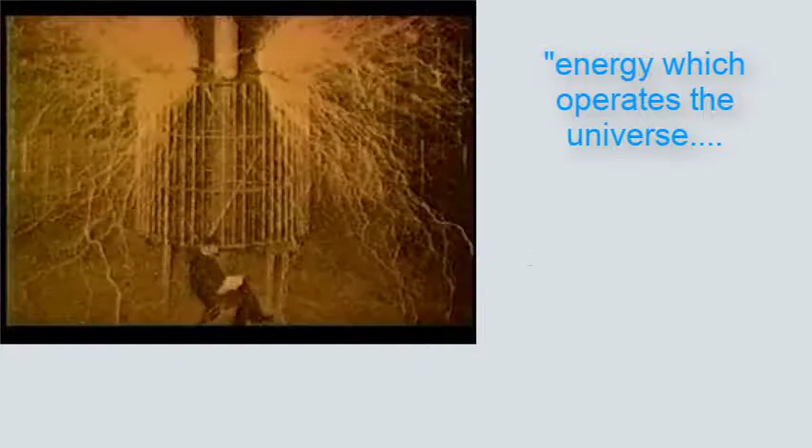With over 200 patents to his name, Tesla was well on his way to transmitting electric power without wires when he ran into trouble with J.P. Morgan and the financial interests of 1901. His ambitious Wardenclyffe project to magnify and transmit power to ships at sea, and eventually to provide free electricity for the whole world, was scuttled by Morgan, leaving Tesla penniless and disillusioned.

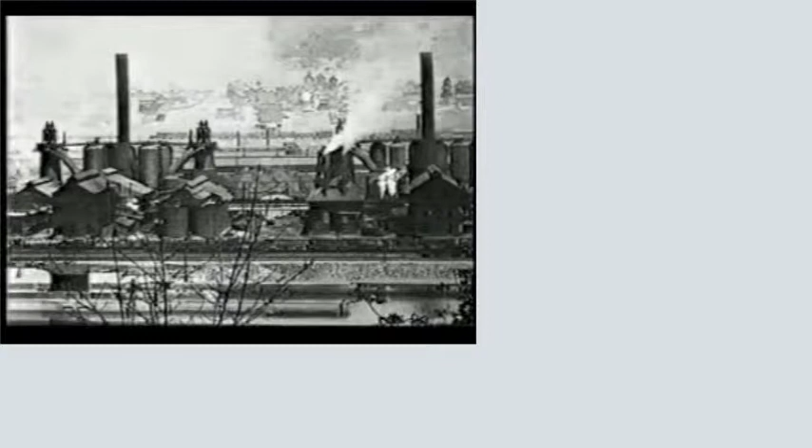The wealthy industrialists of the time knew that their vast plans to wire the world with copper from the mines they owned would be upset if they could no longer control the supply and means of delivery. Tesla's beliefs about developing technology in harmony with nature conflicted with the prevailing American attitude at the time that mankind was put on Earth to subdue and dominate nature.

Little by little, Tesla was denounced as a crackpot and deleted from the historical record. At the time of his death in 1943, Tesla's truckloads of scientific papers were seized by U.S. government agencies. Who knows what ideas and remarkable devices our world could have inherited if only his genius was recognized.

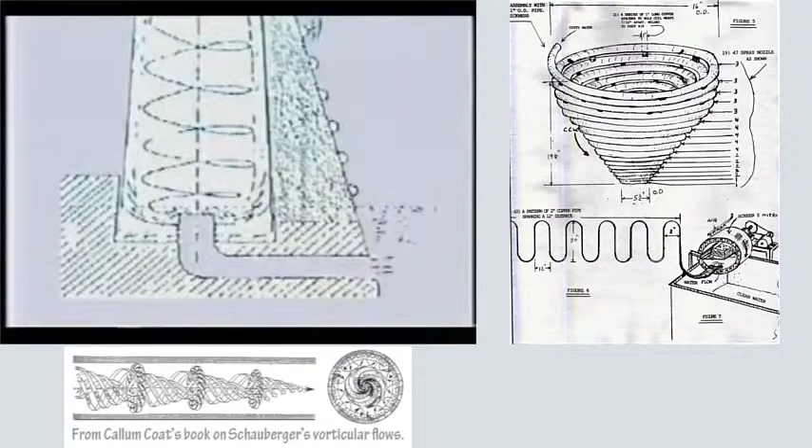Victor Schauberger's vortex experiments during the 1930s resulted in an advanced understanding of how the spiraling motions inherent in all natural systems reverse the effects of entropy. By studying the properties of inwardly spiraling water, he created an implosion generator that concentrated electrical charge.

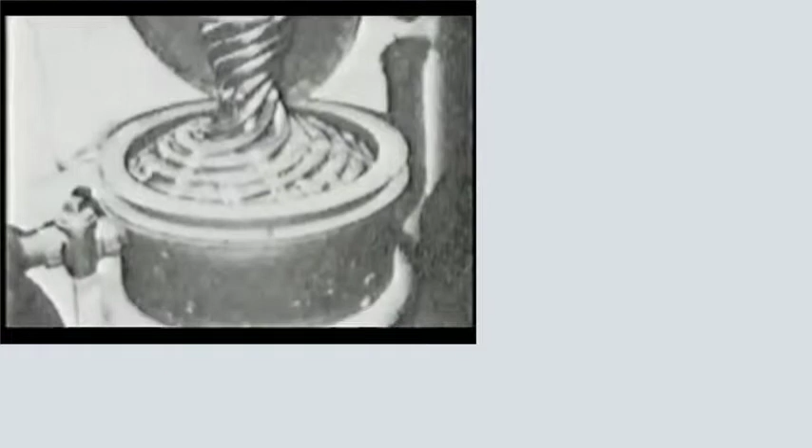Schauberger's ideas became widely known before World War II, when he was coerced to work for the Nazis on exotic discs that resembled flying saucers, as well as his energy generator. In 1958, he traveled to the United States, where he was told he could manufacture his devices, but he was duped into signing over all of his rights, and none of his inventions were ever developed. Returning to Austria, he died a bitter and broken man.

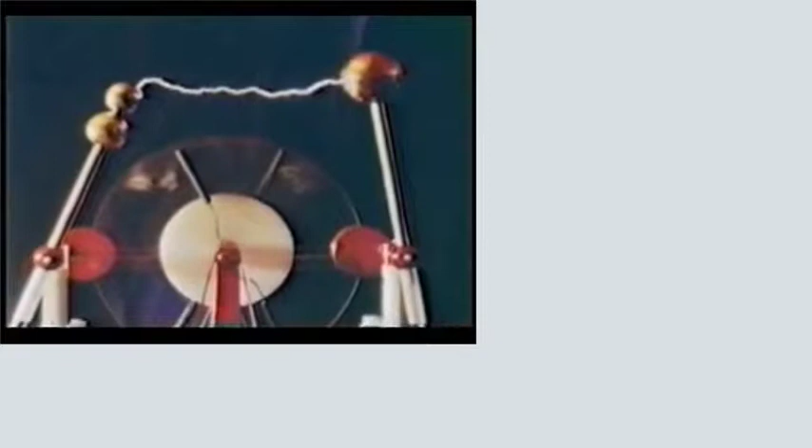Benjamin Franklin is credited as being the inventor of the electrostatic motor back in the 1700s, but its power output was modest. The Wimshurst electrostatic generator is a high-voltage mechanism developed in the 1800s, which can be hand or self-started and will produce dramatic sparking while charging Leyden jars. Today, it's used in teaching about electricity, but its practical applications are considered inconsequential.

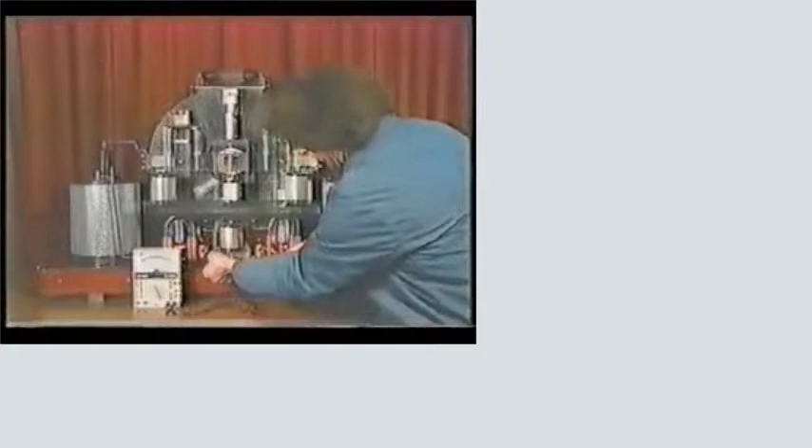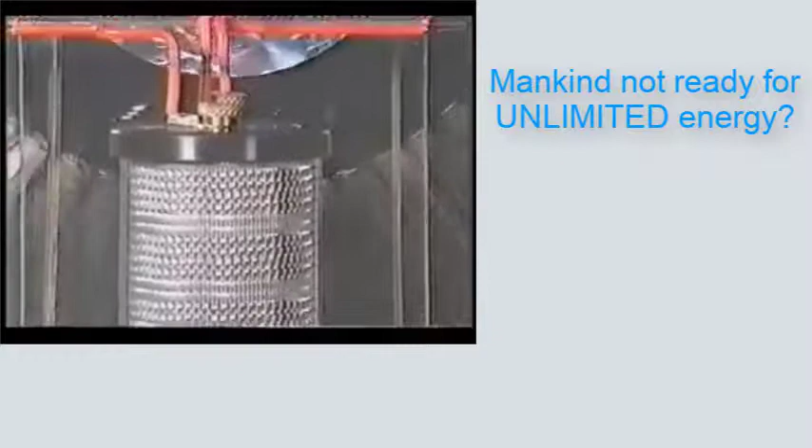A high-tech variation of the Wimshurst device is the Testatica, or Swiss ML converter. Developed by Paul Baumann of the Methernitha community in Switzerland during the 70s, this free energy device is a marvel that has been in operation for more than 20 years, supplying electricity to the small, self-sufficient Christian community. Many technical experts have come away stumped by its excess output. However, because the community feels that the majority of mankind is not ready to be responsible for such unlimited energy, they're keeping the technology under wraps until such time the world is spiritually prepared.

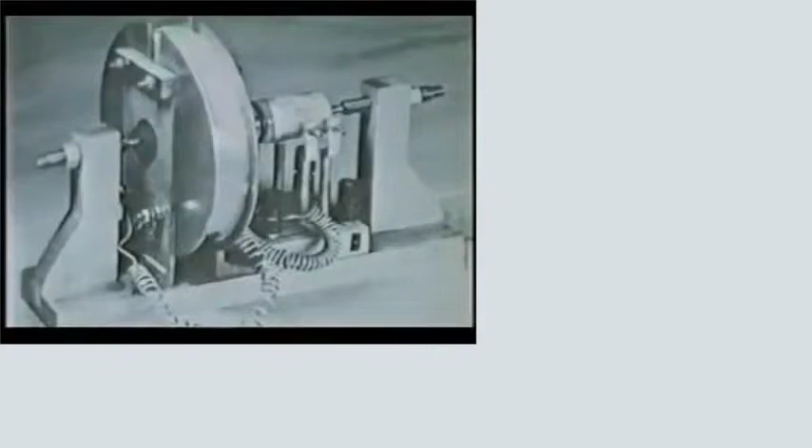Other researchers, like Dr. Oleg Jefimenko, continue to pursue real-world applications for harnessing the electrostatic motor. Like the homopolar generator, the electrostatic motor is based on the dynamics of our Earth environment. As with wind and solar power, they offer real, sustainable alternatives that, with only modest gains in efficiency, could contribute to the replacement of our current dependence on fossil fuels.

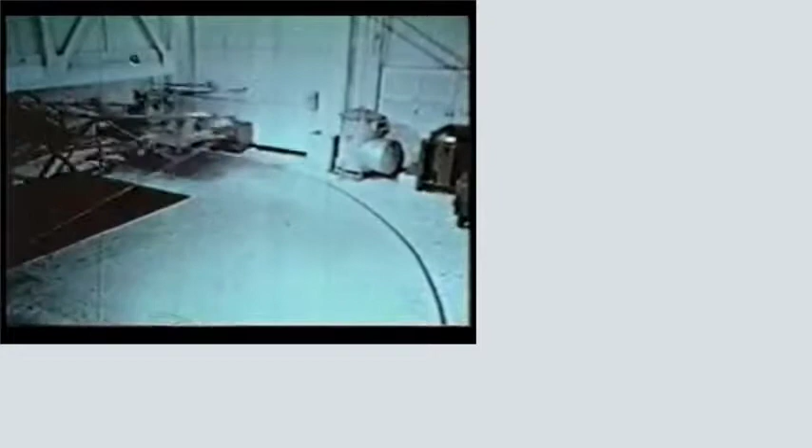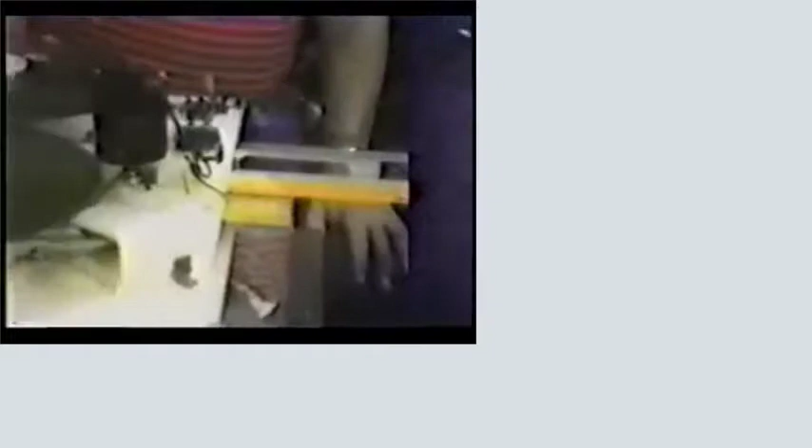The force of inertia is known in mechanics, but until only recently, it had been considered too weak and difficult to harness for propulsion. According to some theorists, like Hal Puthoff, inertia, like gravity, is what occurs when we try to accelerate an object against the zero-point fluctuations in the vacuum. We run into resistance.

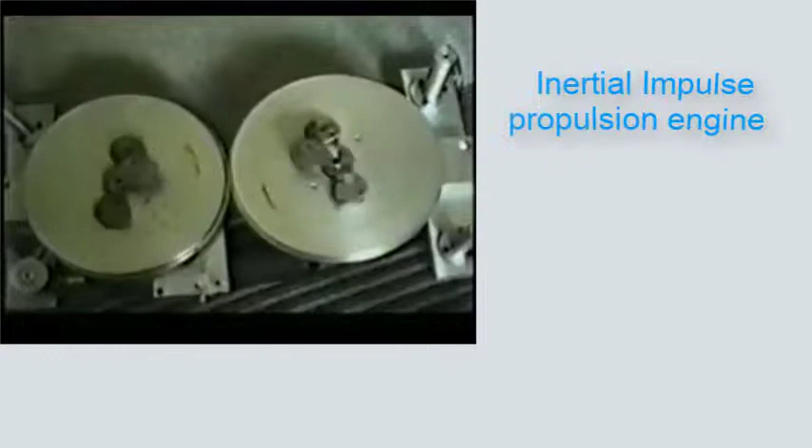Canadian inventor Roy Thornson has developed an inertial impulse propulsion engine which overcomes that resistance using centrifugal force. It pushes against nothing and emits no exhaust, but it's been calculated to be 20 times more efficient than a jet engine.

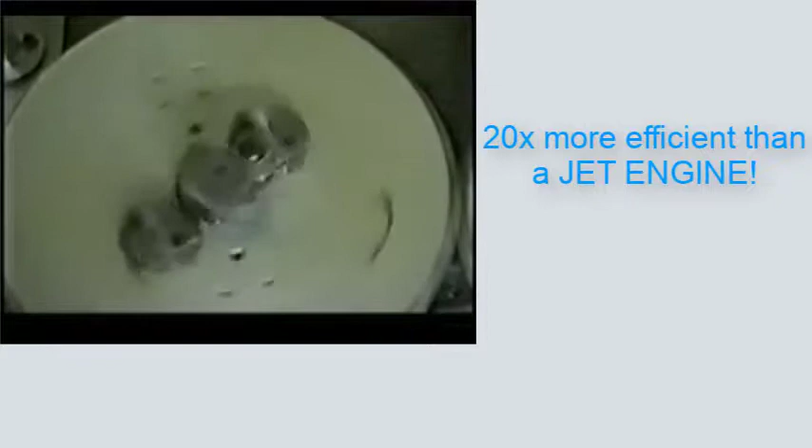Here, the Thornson inertial propulsion drive powers a canoe in a swimming pool. The motor, which is housed in a box, never contacts the water or air.

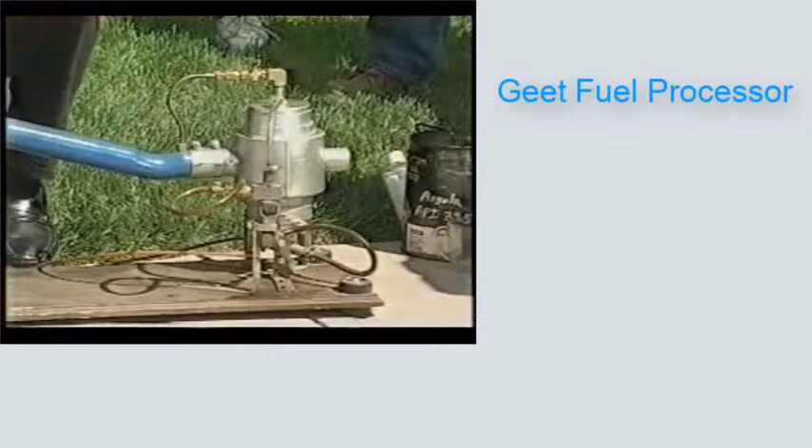Utah inventor Paul Pantone has developed what he calls the GEET fuel processor, a plasma generator similar to a super carburetor that actually appears to run on 80% water and is entirely non-polluting. This device replaces the carburetor and exhaust and combines them as one unit, whereas this end of it acts as a miniature refinery, allowing the engine to run on everything from battery acid and water mixed to crude oil right out of the ground. This is Angola crude, a 39.5 gravity.

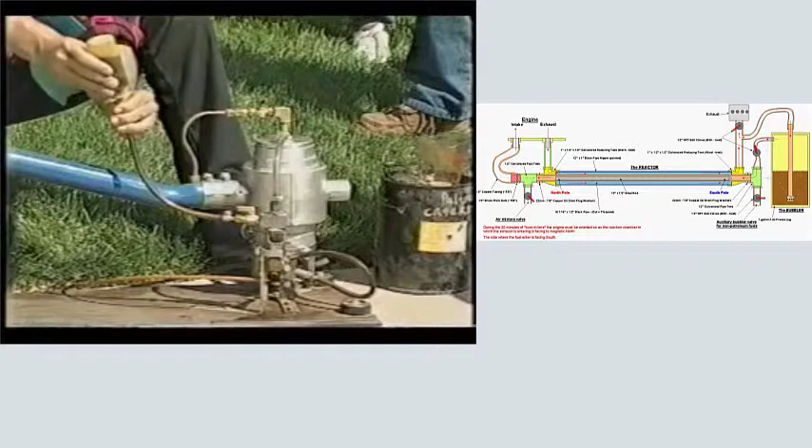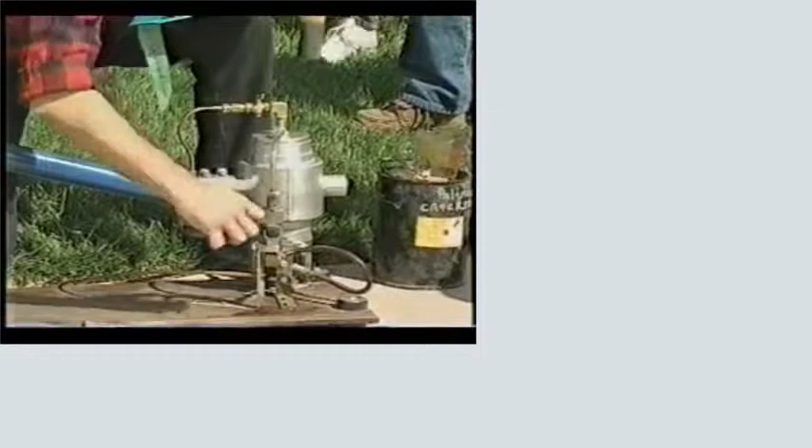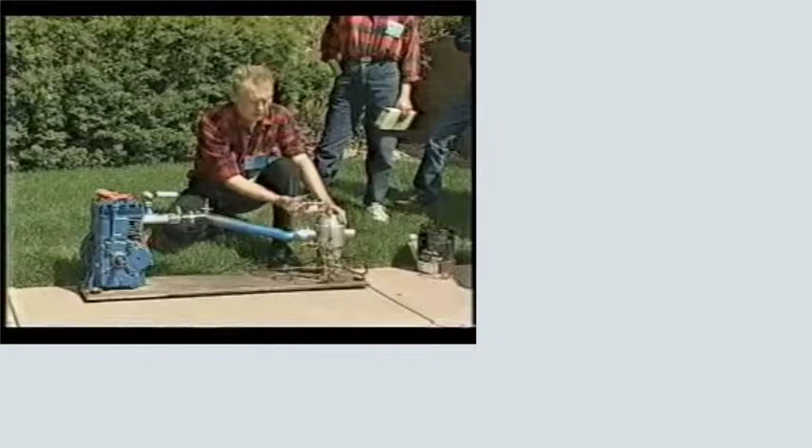The exhaust coming down goes around and comes out here at the far end. The center chamber draws some of the heat from the exhaust, plus this tube takes some of the exhaust gases, takes them up into the chamber, and bubbles them down to the bottom. The bubbles, as they come through the fuel, are brought up to the top of the chamber, picked up through a tube, and fed up the center of the exhaust pipe. While they're being fed up the exhaust pipe, they are in a vacuum, and there's a heat exchange which occurs.

This process has been argued a few times to be either a plasma field or an electro field. We do know that it does have a slight radiation, which is not alpha, beta, or gamma, and we do have x-rays to show that whatever is coming from the unit does get affected differently from stainless steel than the regular steel.

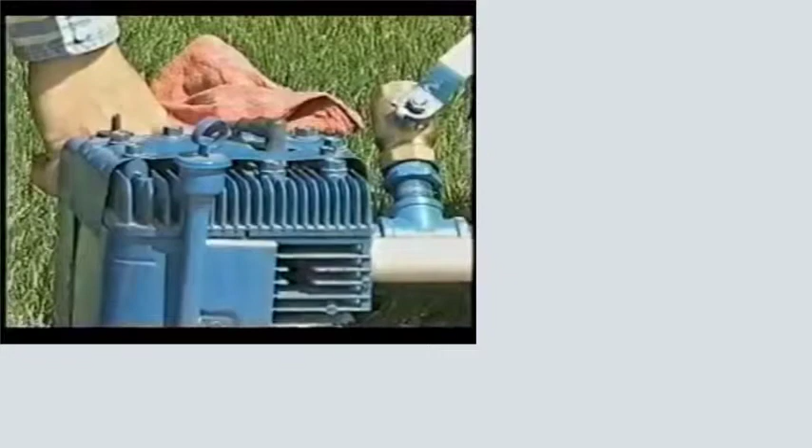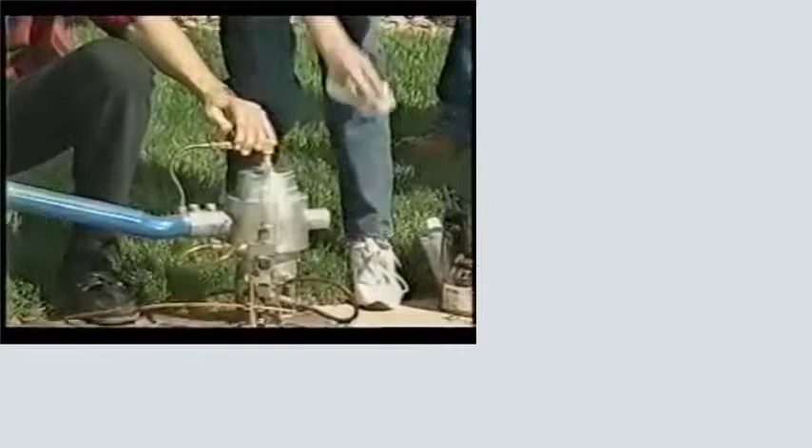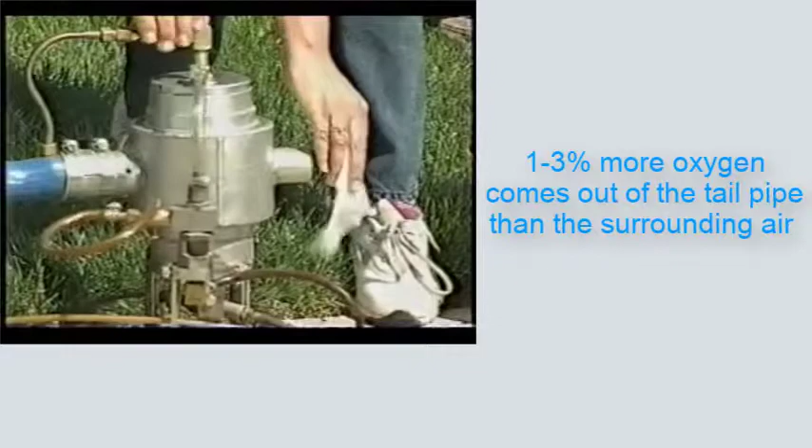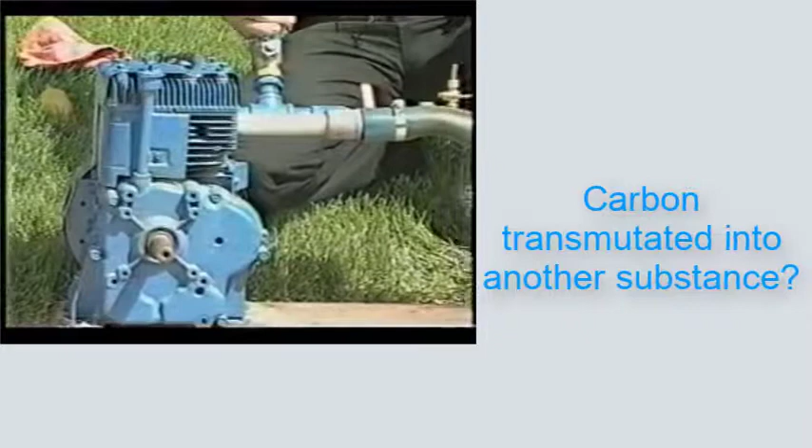When the temperature of the exhaust is the same as the air temperature going in from the air portion, there's normally 1 to 3% more oxygen coming out of the tailpipe than there is in the air we're breathing, and no carbon at all. Carbon vanishes - I wouldn't say vanishes, I would say transmuted into some other substance, a lighter element.

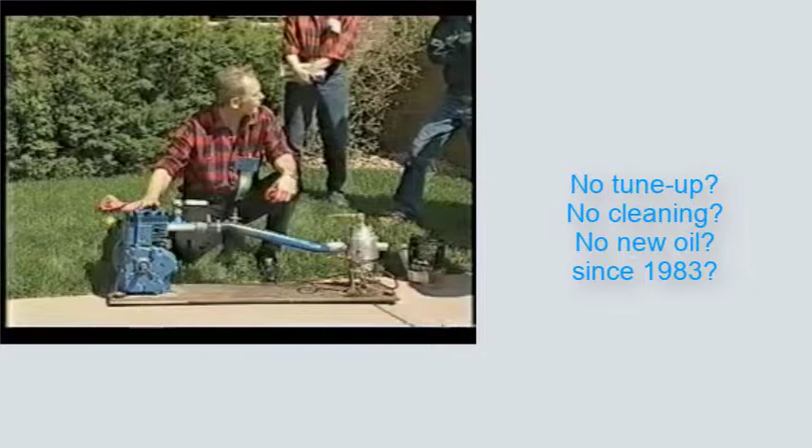After running this engine from 1983 until now, and many times we had it running 8.5 hours a day, we have never had to change the spark plug, change the oil, or clean it. We have taken the head off 3 times to inspect the inside of it, and it's been spotless.

What we have here is the Pantone GEET device fitted to a Ford 2300cc 4-cylinder engine.

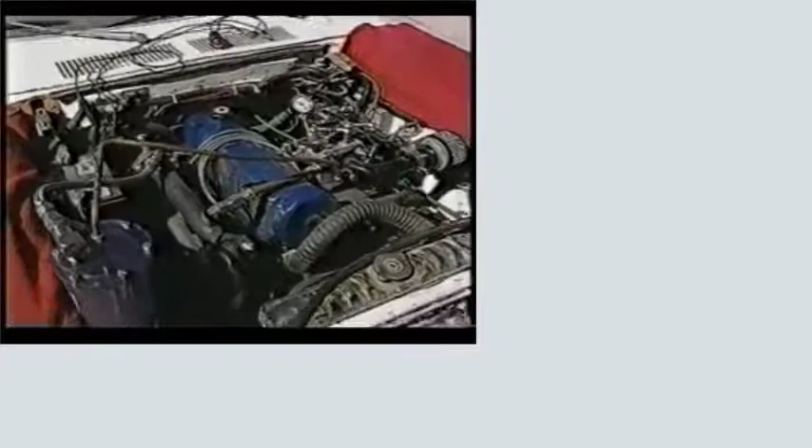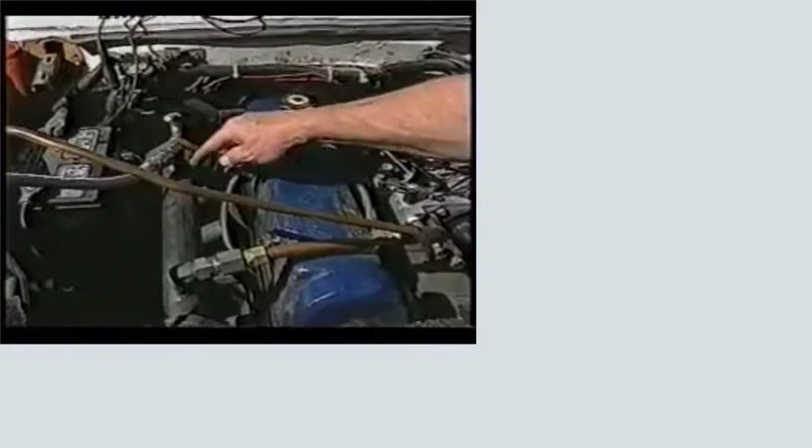As you can see, we have a see-through container here which holds the fuel. As the engine is started, air is drawn in by vacuum through the fuel and bubbles the fuel, the vapors of which are drawn off here. They travel down this hose into our reaction chamber, go up the reaction chamber, and return back out here to be taken into the engine through this tube.

This is our air filter, and this tube is connected to another valve, which are controlled by this linkage, operating the air intake and the fuel intake. This is the valve that controls the return air going through this tube into the bubbler.

During the testing with the 2300cc Pinto, we have achieved efficiency up to and including 300% of normal. If this engine normally got 20 miles to the gallon on the highway, you'd now be looking at 60. Our load tests and whatnot have not been completed, but we feel very confident that there's not going to be a power problem.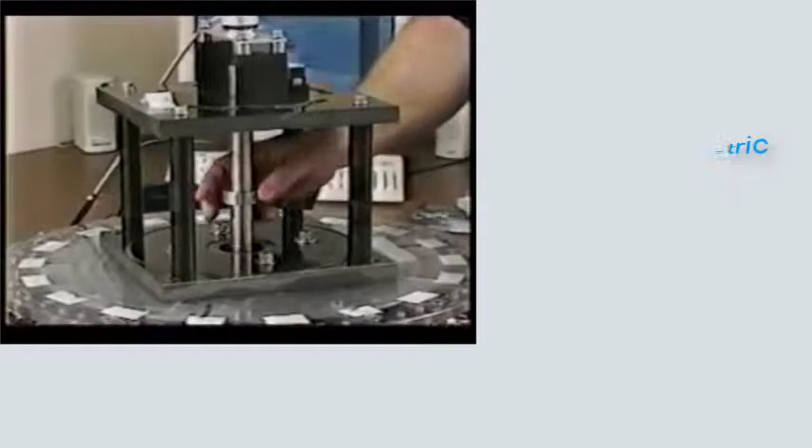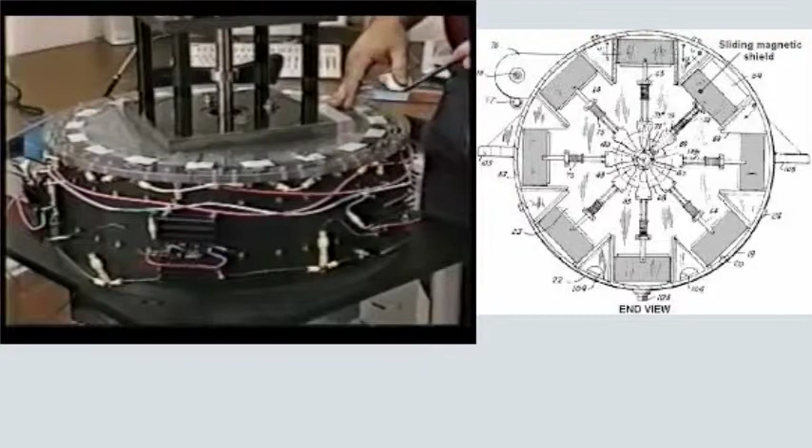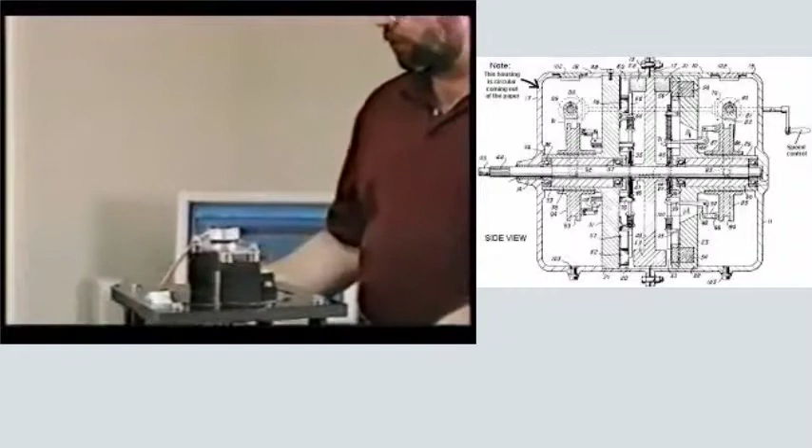There's 18 separate sections, what we call a coil section in here. 18 make up the outer diameter. There's 6 coils here that we're using to drive the motor. At the top here we have an encoder which sends a pulse down to the electronics and basically lets the electronics know where the rotor, the rotating part here, is in relationship to the coils and tells the coils when to turn on and off.

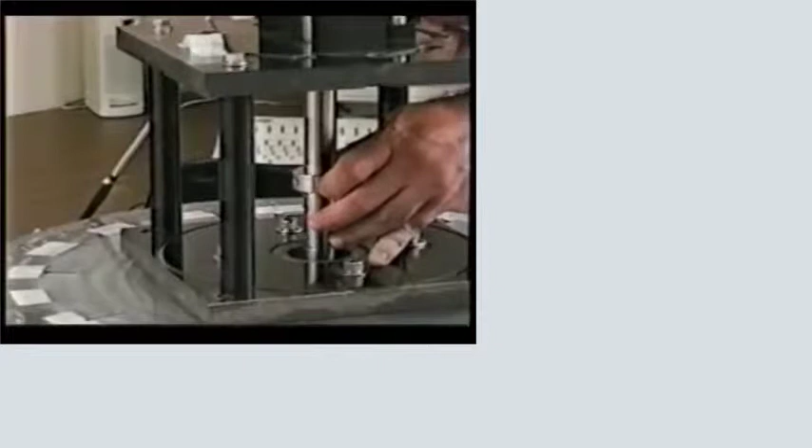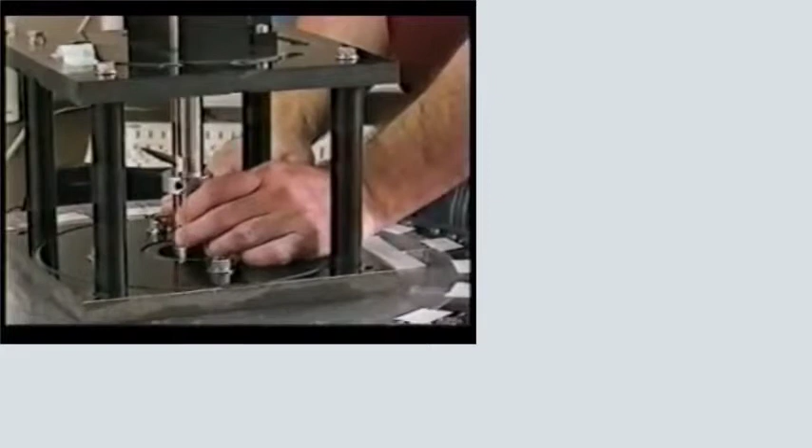That's done by a specific index point that the encoder has that sets the relationship between the two. The electronics down here in the box is basically a set of TTL logic counters. It counts the number of pulses from the encoder, and it turns the power on and off to different coils depending on where the rotor is at the time.

We have also hooked up to this system a connection to the computer over here. What it gives us the opportunity to do is change the duty cycle on the system. We can change it from a pulse rate of 1 pulse per cycle up to 40 pulses per cycle, which would be 100% duty cycle.

That is incorporated in, and what we do is change the pulse rate on the computer. It downloads the data to the electronics. When the index pulse comes around, which comes around once per revolution, it updates the data in the counters, and that's what changes the pulse rate on the system.

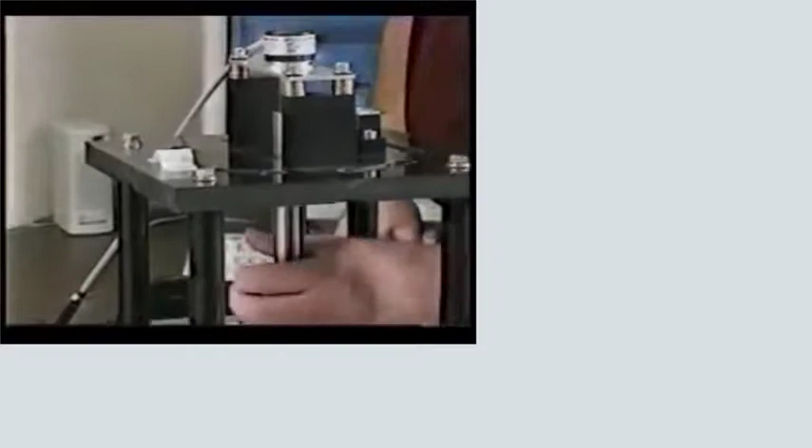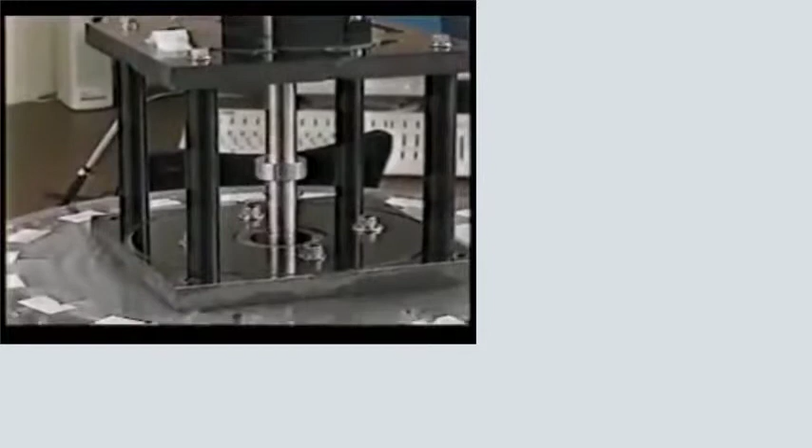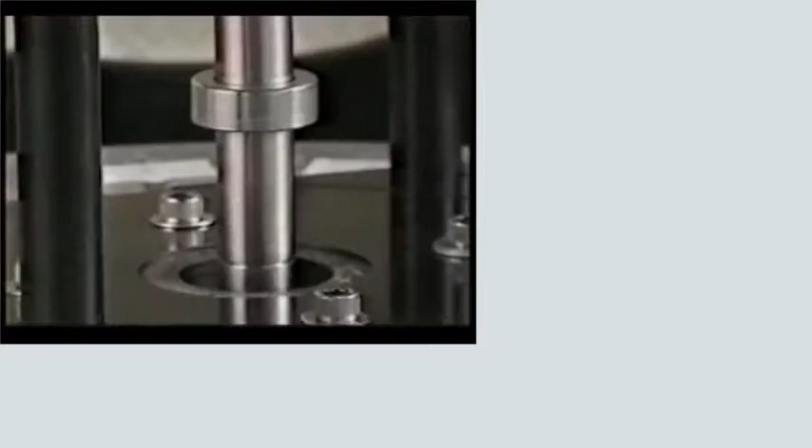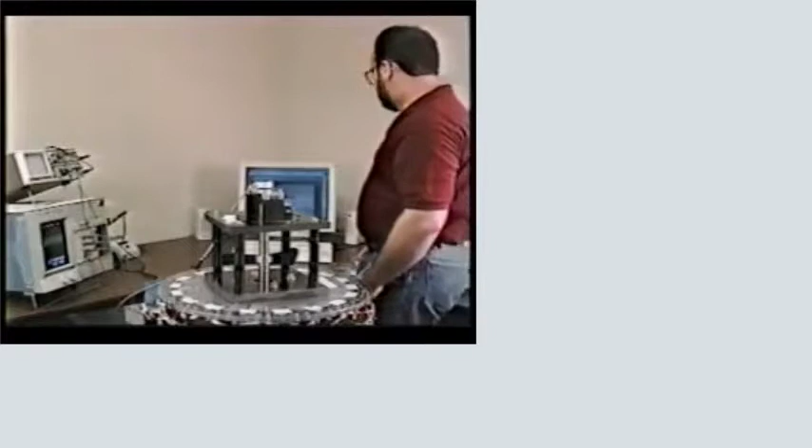The thing about this system is that everything floats on the magnetic field in there. You have very little internal friction. Once the system gets up to speed, it stabilizes at a certain RPM. Right now we're running at about a 30% duty cycle per channel. The speed is still coming up a little bit.

Calculate the speed off the scope here, and we're running about 1,850 RPM. This white and green shows the 2 channels on the motor. The little spikes are the amount of time each channel is on, and the flat part at the bottom is the amount that it's off. So you can see how much is pulsing, how much time it's off, and how much time it's on.

One analogy we like to use: it's like if you pick someone up and carry them across the street, you use a lot of energy. But if you put them in a tire, once you get it started, all you have to do is tap it a little bit, and you use a lot less energy to move the same load. That's what we do—we build it up to a high speed, then just tap it with a little juice as it goes around, using the inertia built into the system to take it the rest of the way.

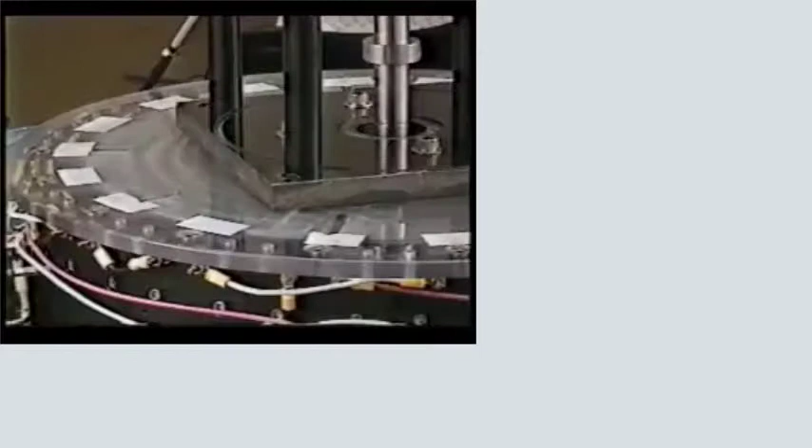So we're using a high-speed pulse on the system. What we're doing is removing energy from the magnet. The magnet has a specific life—they lose approximately 1% a year. So we're not actually trying to create energy from nothing. The system will not run forever; it's not perpetual motion. We use the amount of energy that's in the magnets. Once that energy is used up, the magnets can be taken out and recharged. All we're doing is maximizing the efficiency of the electromagnetic flux density that's there for the production of electrical output.

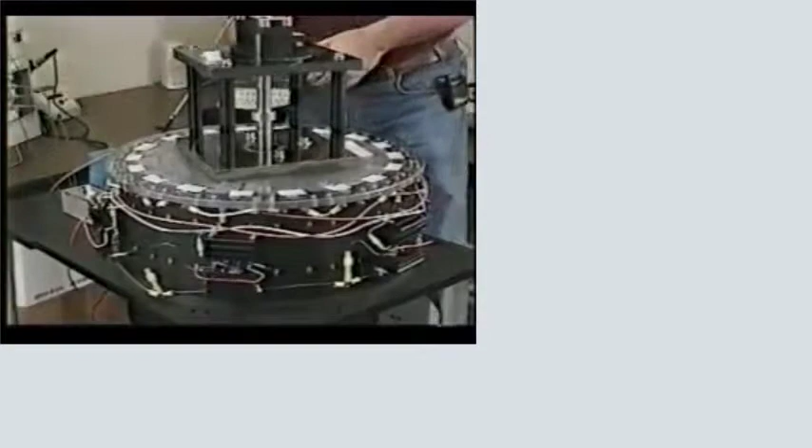Troy Reed has been busy in his shop constructing rotating magnetic motors that he believes will soon revolutionize how we get around. And it does work.

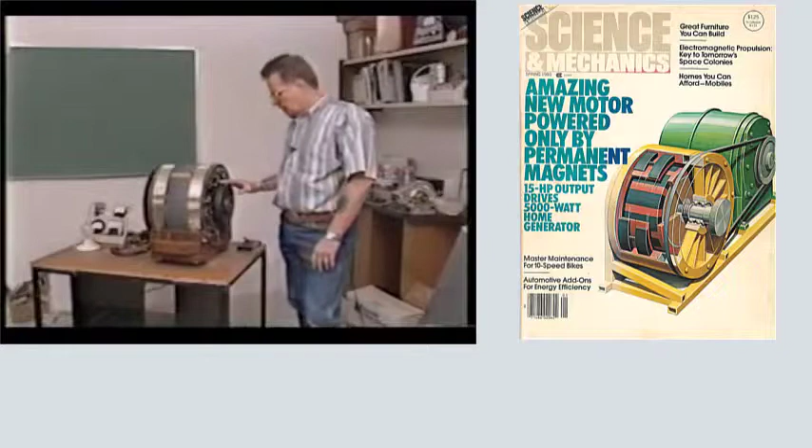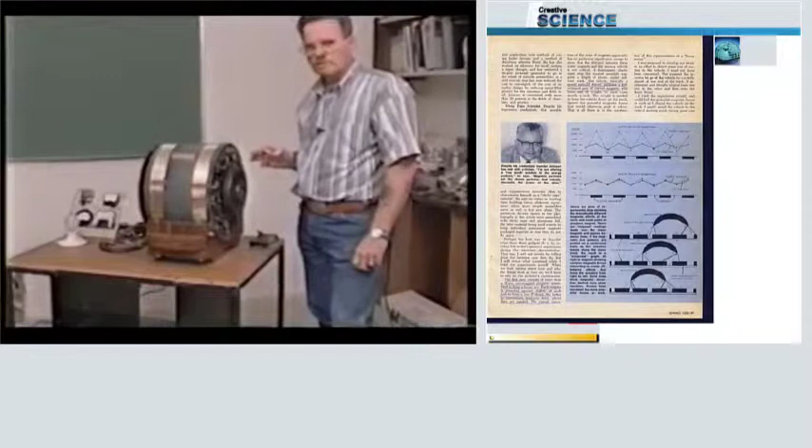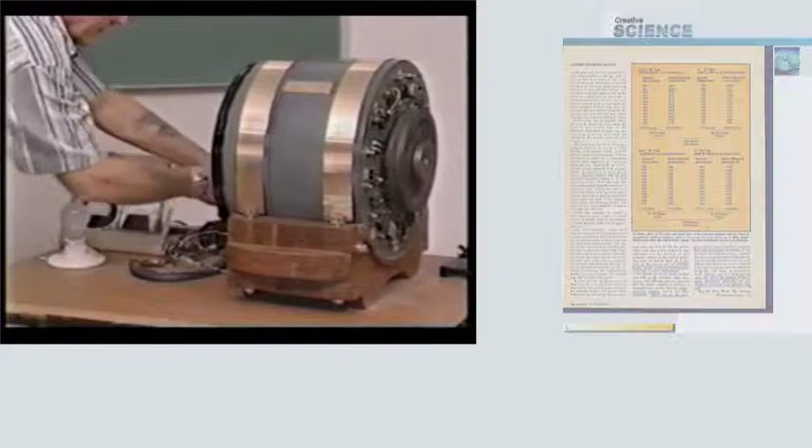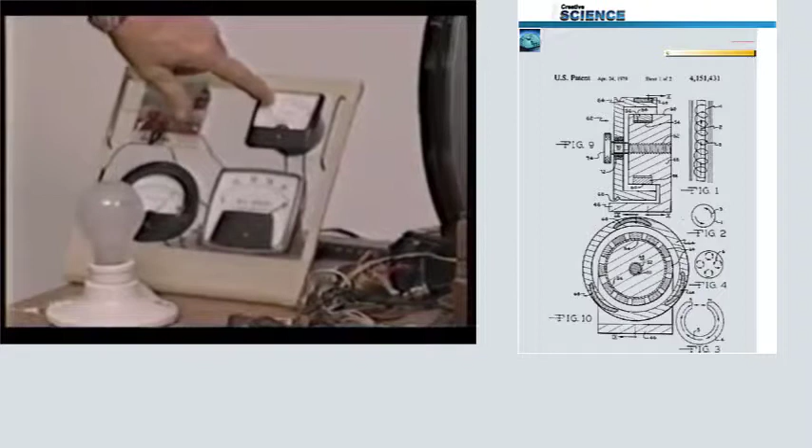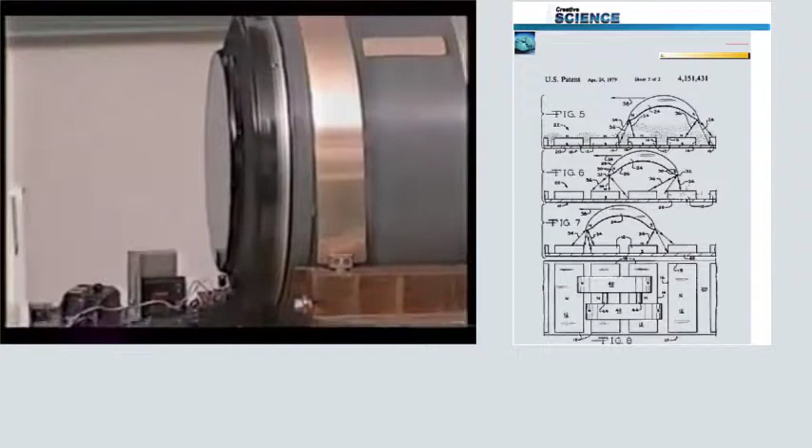As you crank this motor up, like you do the other one, the motor will start running, and what I'll do is energize it on this motor here. If you can see these amp gauges, when we get it up to about 150 volts, we'll unplug it and turn the light on. If you turn this around you can see this side—all the working parts are behind this system, operated from a little computer. It takes this 5 volts up to 150 volts.

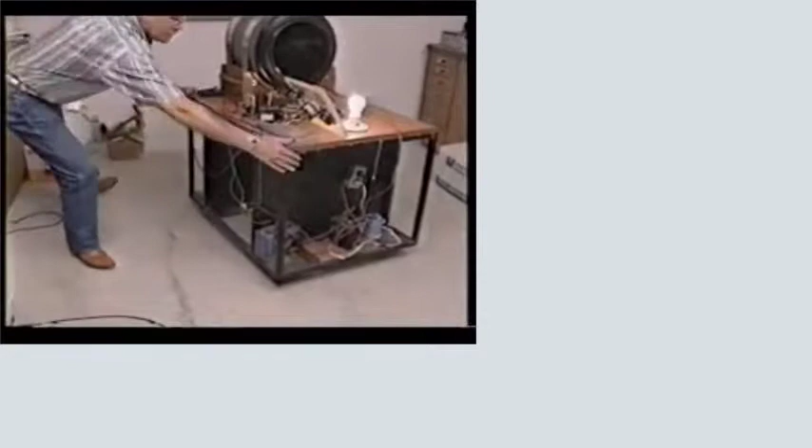What we're going to do is turn off all the switches, make sure nothing's plugged into it. There's the plug—there's your 110 volts. Motor still running. You can rotate this table plumb around, still got energy running, nothing tied up in the back of it, nothing on the floor. Rotate it around—still running electricity.

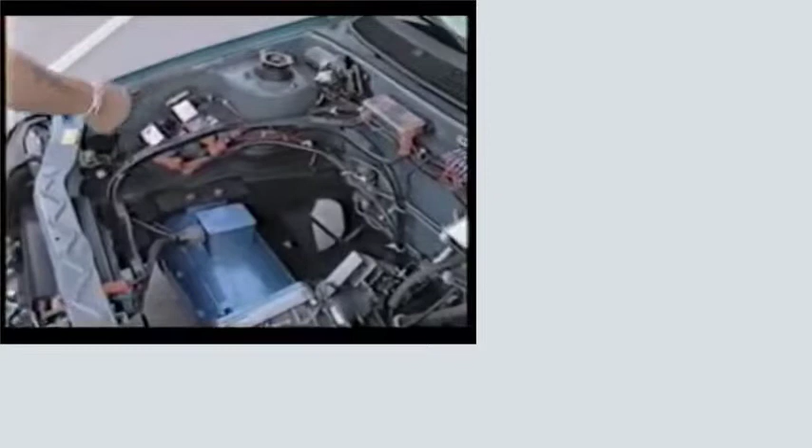This is an automatic transmission car. There's not a whole lot of what you'd call junk under this car. I've seen a lot of electric cars that had a lot of stuff in them. The only thing this has a battery for is to run the radio and the blower. We've got 2 safety switches over here that could be mounted into an enclosed system, but we did it this way so people can see this car with the technology. It's a safety switch system. This is a controller box, a Curtis control box.

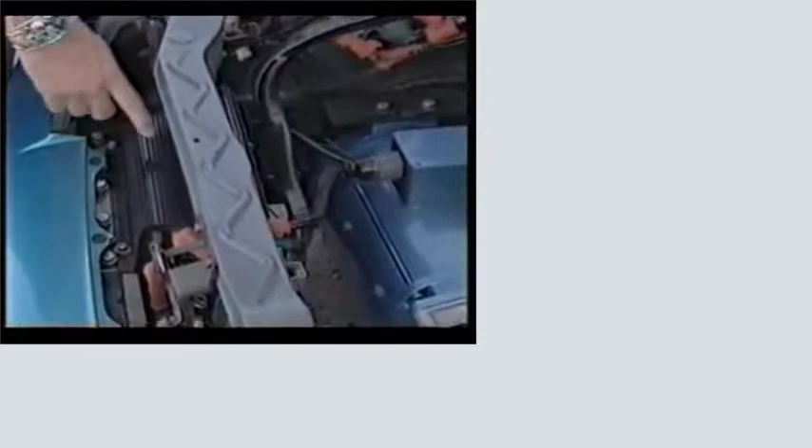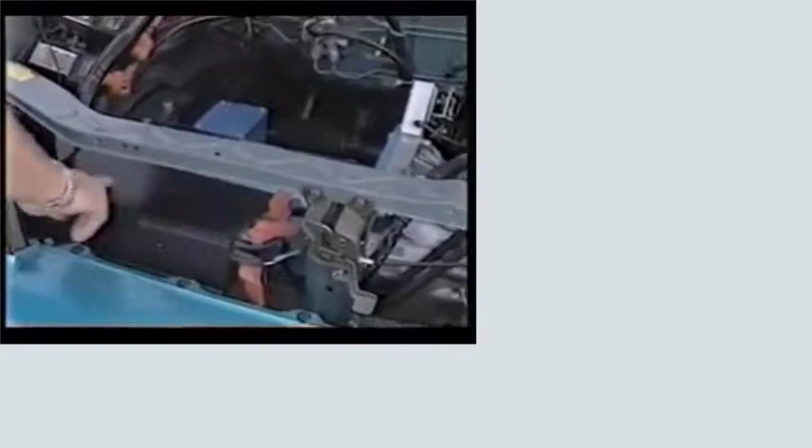It cuts the amperage down. Here's what's real good about electric automobiles: all electric automobiles with surge technology create heat, and they've got to have a fan to blow on the Curtis controller because it gets hot. We don't want that to get hot—we want to keep it cold, because once it stays cold, you save on all the computer chips in this controller. That means you can go farther, longer, and you won't have any problems.

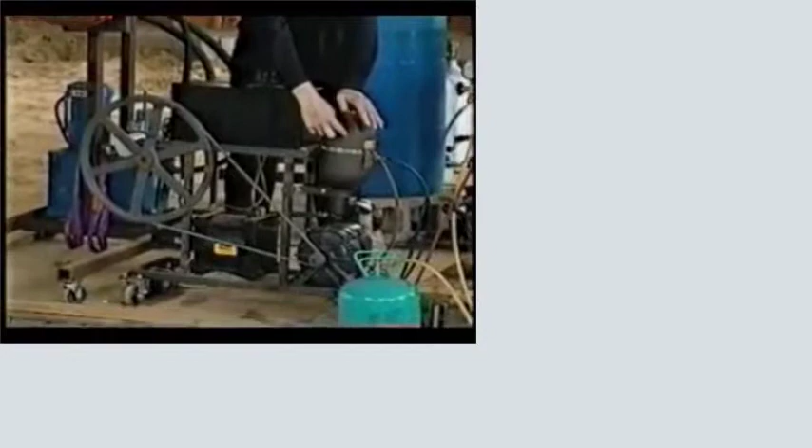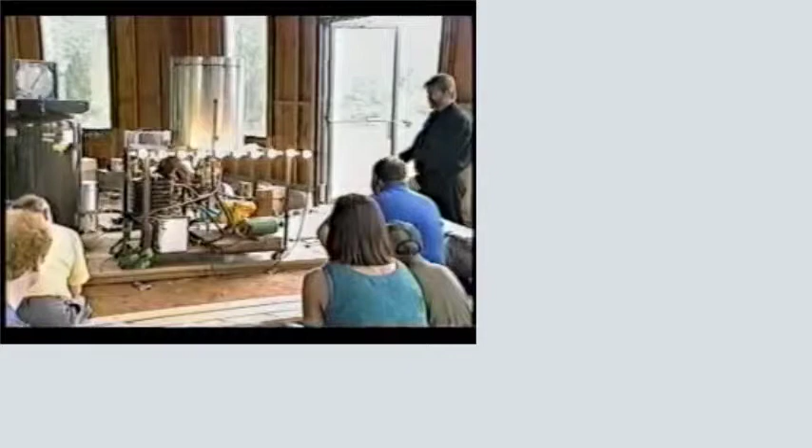But even simpler methods are being demonstrated through common ingenuity. Dennis Lee of Better World Technology has been struggling to pursue his dream of achieving energy independence for everyone on the planet. Held in prison for 2 years without ever being convicted of a crime, Lee mounts public demonstrations in major U.S. cities, lining up individual dealerships to market his devices. A controversial figure whom some dismiss as a fraud and others see as a legitimate, if outspoken, P.T. Barnum of free power to the people, Lee has assembled an impressive line of prototypes and processes, including those by other inventors like Yull Brown.

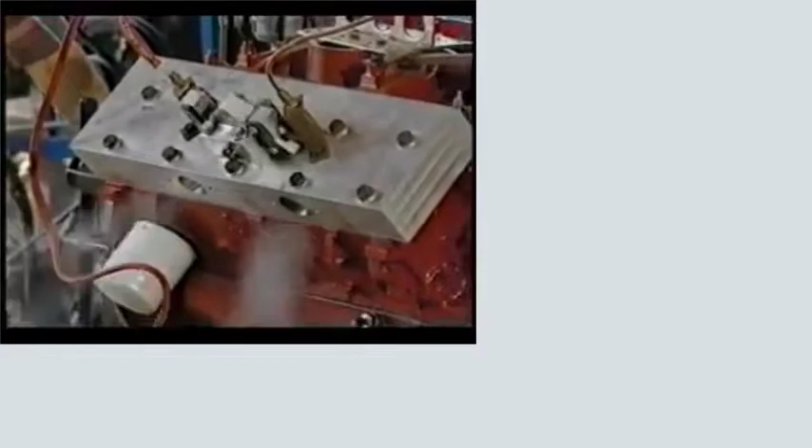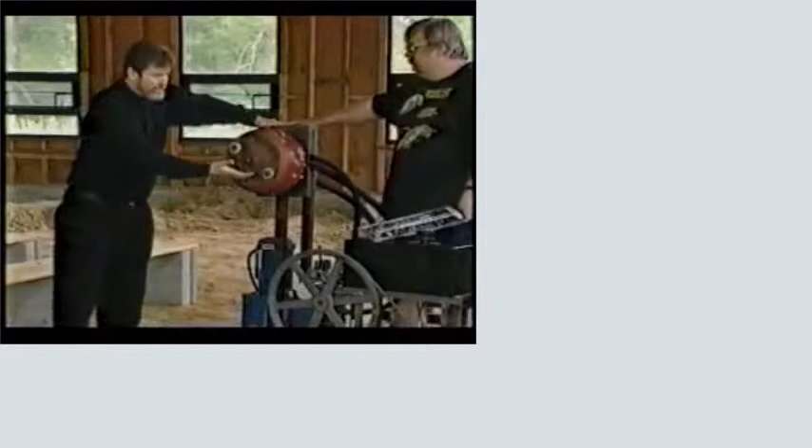Although he claims his machines are not utilizing zero-point energy because they draw heat from the surrounding air, his numerous devices supposedly achieve super efficiency rates by recycling excess energy through closed-loop systems.

I built the world's most efficient heat pump, and these are the evaporators for that heat pump right here. They're 8 feet high, 3 feet wide. The refrigerant we put in here boils at 40 degrees below zero.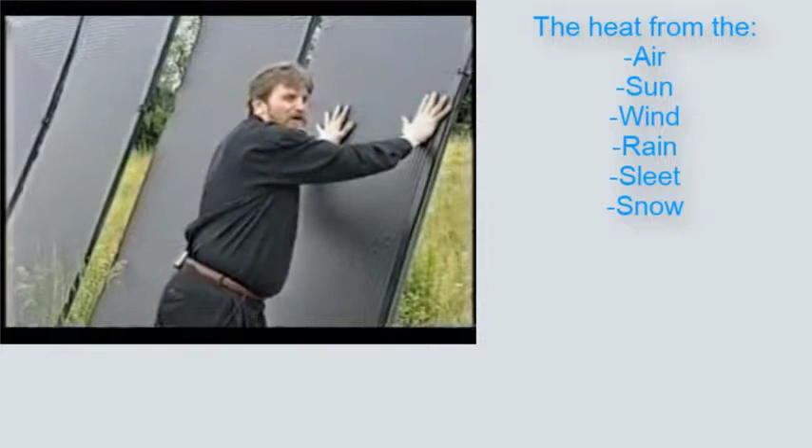Therefore, anytime, day or night, outside in a rainstorm or a windstorm, a hailstorm or a snowstorm, or on a nice hot sunny day or in the middle of a cold night, as long as the refrigerant inside this panel is colder than whatever is hitting this panel, the heat from the air, the sun, the wind, the rain, the sleet, or the snow will be transferred into the refrigerant on the other side, because it's the second law of thermodynamics. Hot goes to cold.

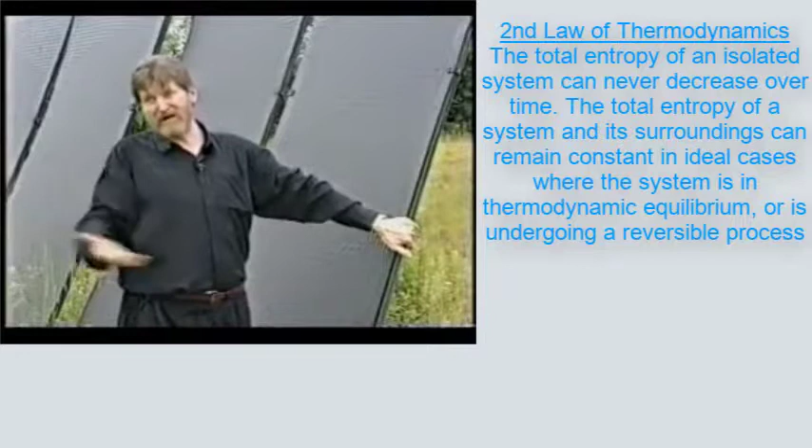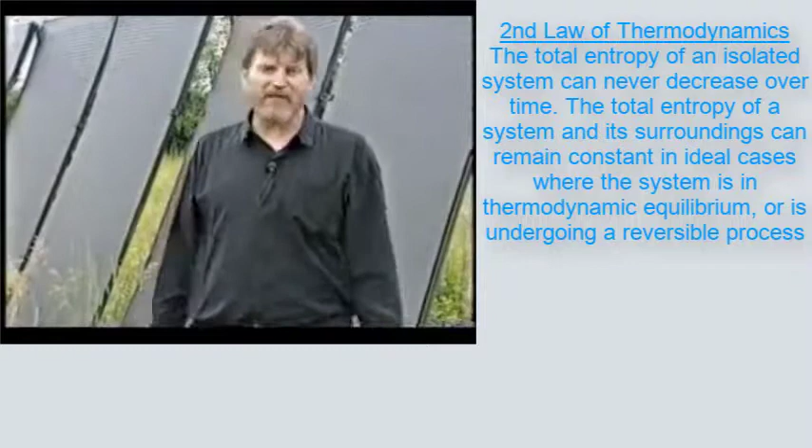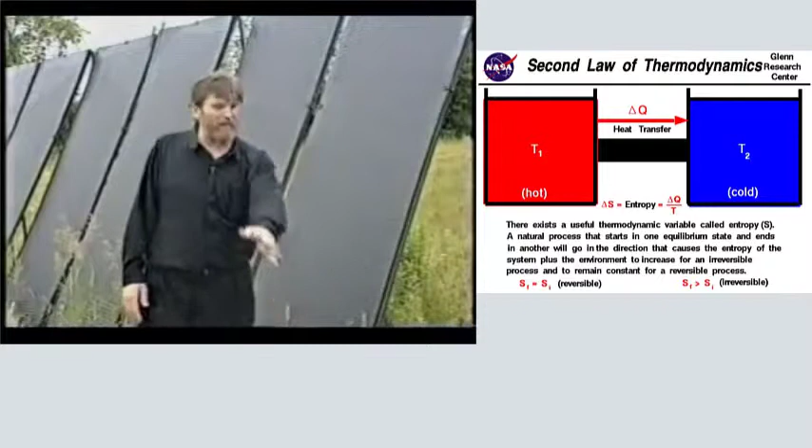So if this is the coldest thing outside, anything that touches it gives its heat to it. A little bit of heat goes a long way. That gas starts expanding like crazy, and as it expands, it's drawn into the compressor, not through suction—I've got engineers and inventors that don't like the term suction, but through negative pressure. As the compressor creates this negative pressure, the gas migrates to it. A compressor is a gas pump; it pumps gas into the compressor and elevates it in temperature.

Even if you touch this panel, it's ice cold to your hand, and if you touch the line going out of the panel, it's still ice cold. When it hits that compressor, the compressor takes all the gas in this space, puts it in that space, and elevates the pressure and temperature. Going out of the compressor, do not touch that line when it's on, because it's 200 to 250 degrees hot.

That's where we get the heat. All of the heat is transferred in here. We then use a compressor to take the relatively useless energy we've got and elevate the temperature and pressure, making it very useful energy. Then that heat is transferred later.

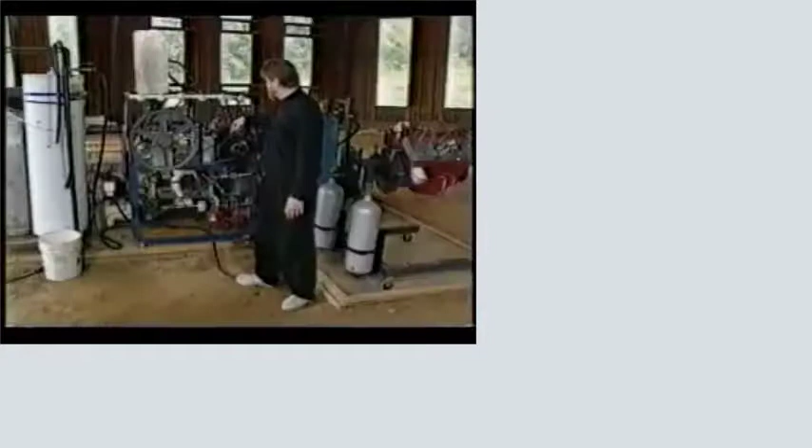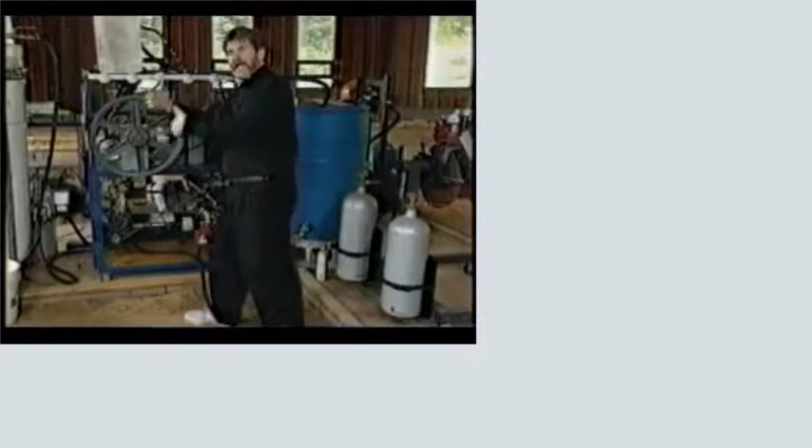This is a direct drive compressor. It takes Freon from the panels, and running it causes the pistons to go up and down. That gives us heat into the boiler. The boiler expands the other Freon back through that into a double-acting piston going back and forth. We're converting that, with mechanical apparatuses, into shaft rotation.

That shaft rotation turns this wheel. As this wheel turns, it causes the compressor to turn. As the compressor supplies the heat, it causes this wheel to turn—you might say these two wheels are powering each other. Once the Freon has taken the heat and made the power, it goes up here. This is a condenser.

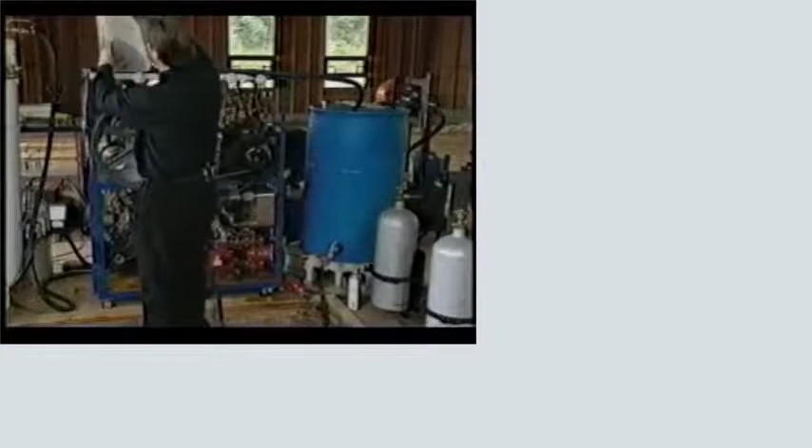We're sucking water out of the bottom of the tank, could be the well, and running the water through this pump, also driven by the same drive mechanism, into this condenser. It's the world's most efficient condenser at 100 degree delta T, 6 million BTUs. As we run the water through, we're making it hotter, and I'll show you the water being pumped. We're also cooling down the Freon, which goes into this canister and is pumped right back into the boiler by a little trombone pump running on the same cylinder.

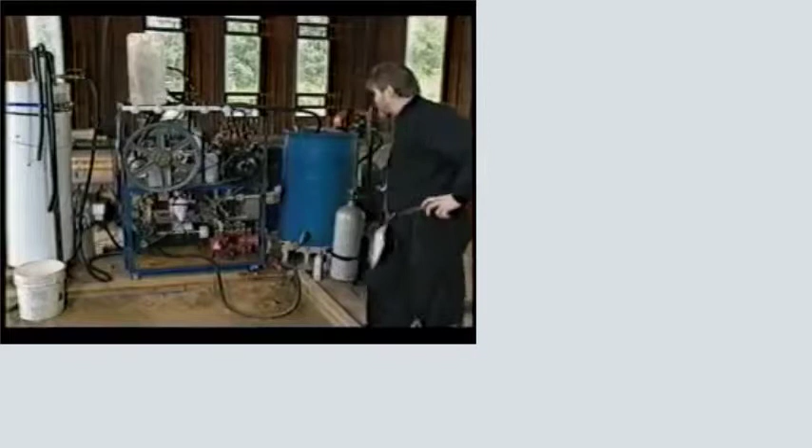You ready to try it? Let's go ahead and try it. Let's turn it on, guys. Okay, if you're ready, Maestro, anytime you're ready. Okay.

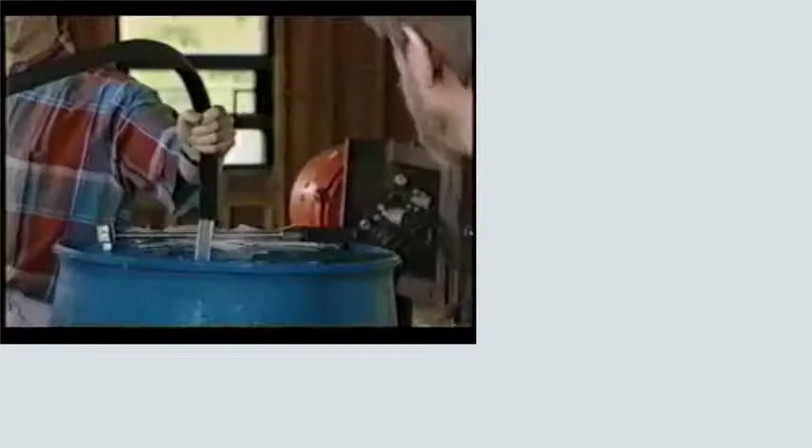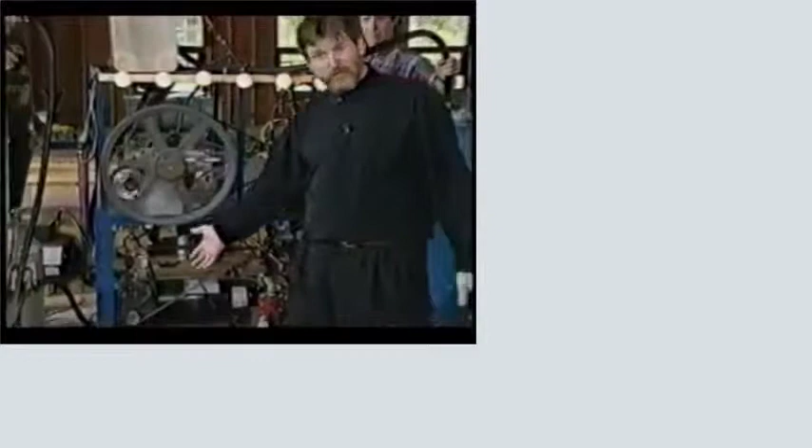So it is pumping water from energy taken out of the air, and we'll light the lights too from excess energy. The lights are being lit from excess energy from the air. They're pulsing—it wasn't set up to do that, so it's not stable, but we wanted to demonstrate the excess power we have. Main thing is it's pumping water; it's supposed to be pumping water. That's a closed loop because it continues through the boiler and back.

I had a heat pump in a walk-in freezer. We cranked the temperature down to 20 degrees below zero in dead airspace. Imagine this, if you have any background in refrigeration—dead airspace, temperature 20 below zero. We did it every single Saturday for an entire year. People from all over the world came to see it.

We said, bring your own test equipment, take the thing apart if you want to. We had a $10,000 challenge to find any gimmick or anything in it. Every single weekend, we cranked the temperature down to 20 below in dead airspace, and we made water hot enough to burn your hand from energy we took out of that box at 20 below, at a 2-to-1 COP—same average performance as the GE heat pump in America, only it's 20 below in dead airspace.

And we challenged all the heat pump manufacturers to come anytime, either find a hoax with us or bring your unit down and see if you can do that. Nobody ever came.

A lot of customers came, lots of people from all over the world came, Pakistan, everywhere. So anyway, we're in here testing this every year, every weekend for a year.

And a man came to the show one day, and what a guy this was. Now, we're trying to build this thing. It's going to take 2 years and $2 million, and I'm raising capital selling heat pump things to get the money. And a guy walks in, and he comes up to me at the end of the show, and he says, Mr. Lee, I am absolutely astonished. I want to shake your hand, and I want to tell you, I have no doubt you have got the best heating system in the world. Yours tops everything out there from solar all the way down the line. You did it. But you need to know me. You know why you need to know me? Because I have built the world's most efficient heat engine, and you have got the world's most efficient heat source. He says, if we got together with our two technologies, we could become the most dangerous men in the world.